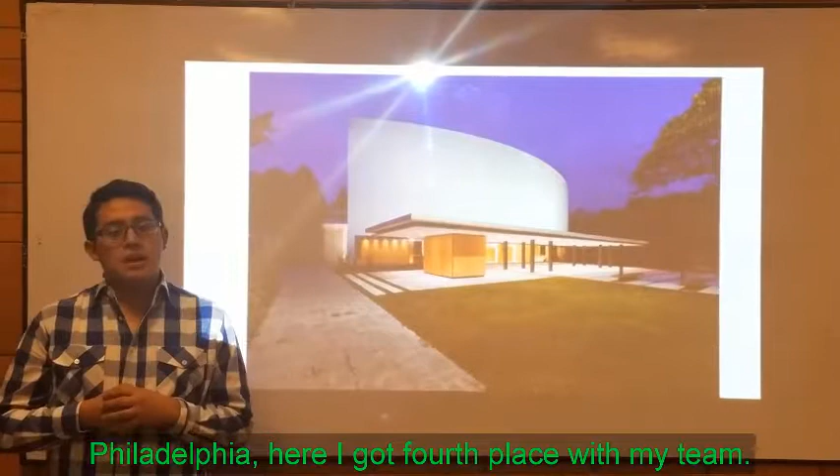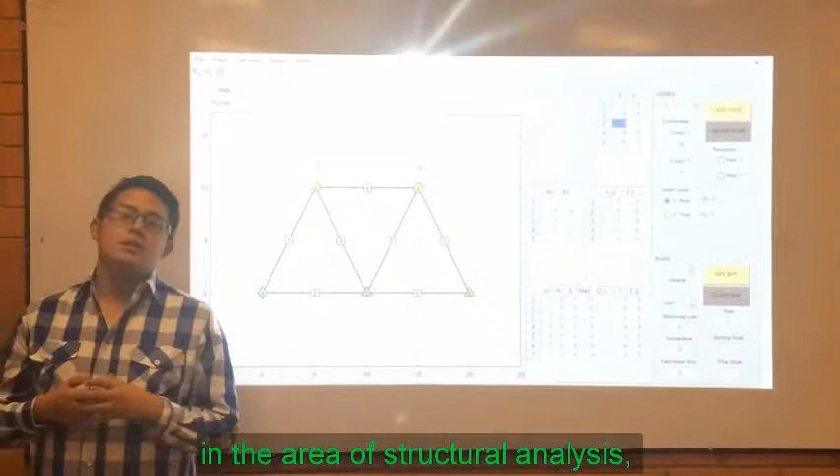I'm 22 years old. I was a professor assistant at my university in the field of advanced geomatics. I also participated in the fourth national competition of highly workable mortars, and in the international ACI Mortar Workability competition in Philadelphia, where I got fourth place with my team. I'm currently the president of the ACI student chapter at my university. One of my greatest aspirations is to be a high-level professional in structural analysis, with the objective of developing tools that allow the adaptation and application of new technologies in structural calculation.

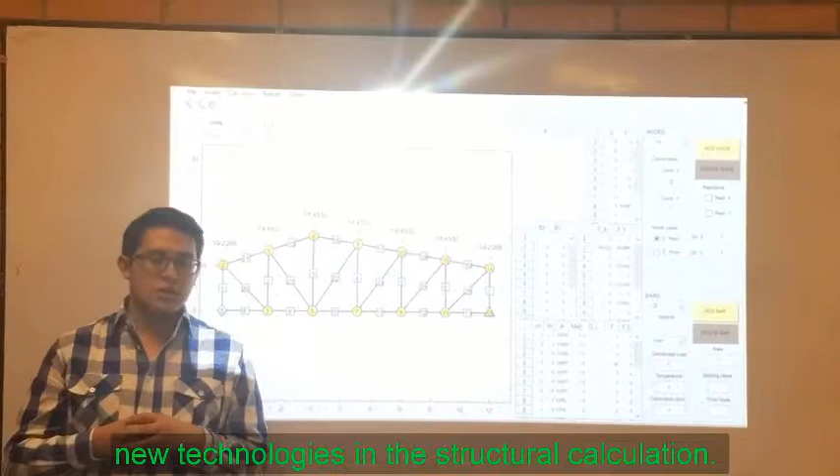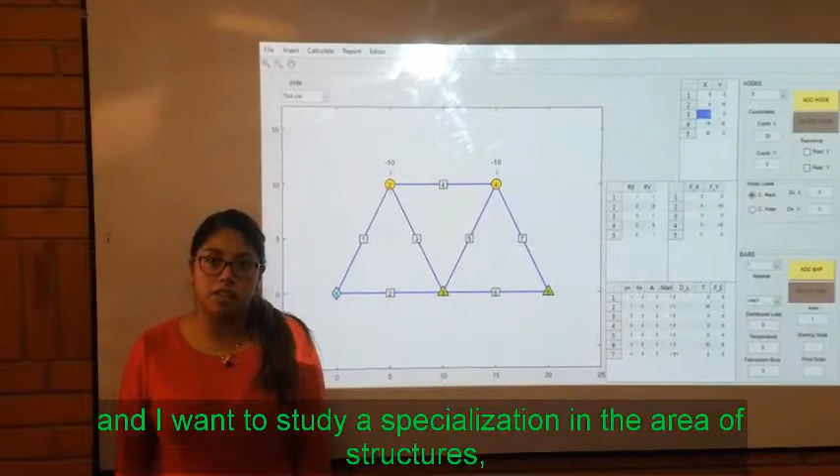Hello, my name is Diana Vasquez. I am 22 years old. Now I am a professor assistant. I am a member and co-founder of the ACI student chapter at my university. I am also the author of several articles published in my faculty's journal. Now I am in the 8th cycle of my major, and I want to study a specialization in structures. So from now we have been developing and strengthening our skills to achieve it, with the creation of this program.

My name is Martin Isaac. I'm 20 years old and I am in the 8th cycle of civil engineering. I am interested in structural engineering because it's difficult, and that challenges me to improve. Designing this analysis program was rewarding because it involved our imagination and developed some of our skills. I want to finish university and study a specialization in structural engineering.

Hello, my name is Cristian Picao. I'm 22 years old and I am in the 8th cycle of civil engineering. I study civil engineering because it's what passionates me, and I would like to be a great professional. With this project, I could see the potential of a technical career like engineering to resolve problems in an easier way.

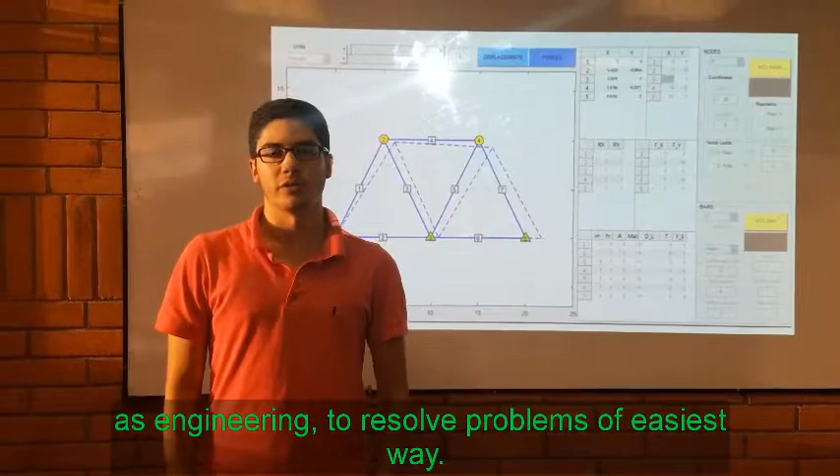The program consists of a main window, where you have the option to choose the units at any time during execution. The materials to be used can be modified from the Editor tab in the Edit Materials option, where you can create or delete different materials used in the structure.

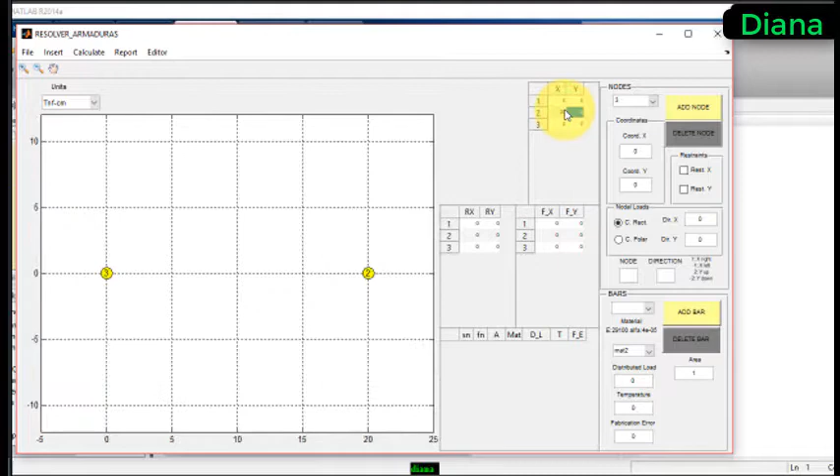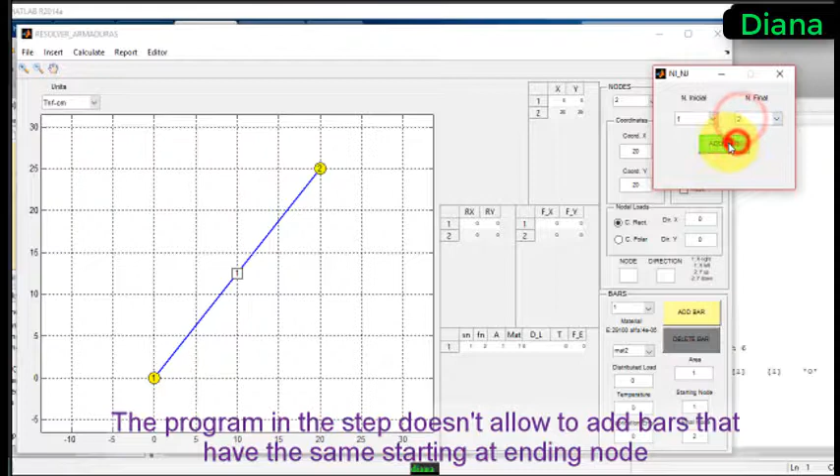There is also the option to perform linear and nonlinear analysis of the structure. If you choose linear analysis, you must add nodes and bars manually. If you make a mistake when placing them, they can be removed at any time. At this step, the program doesn't allow you to add bars that have the same starting and ending nodes. All properties of each bar and node can be modified from the tables or from the respective tabs.

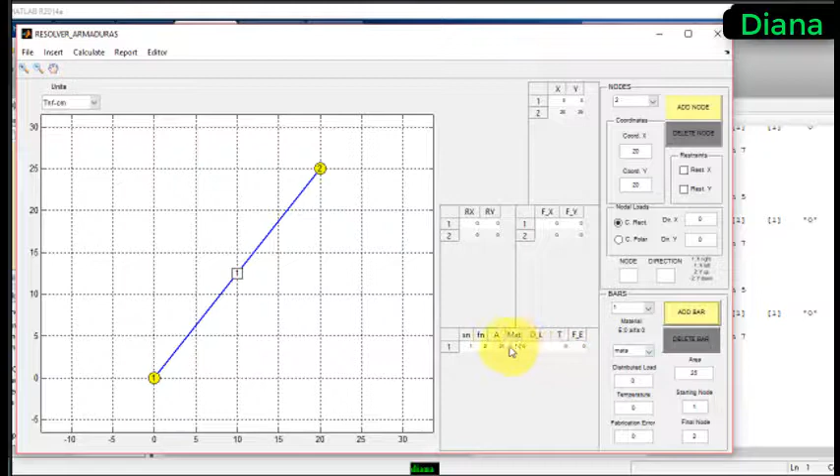When we choose the nonlinear option, we choose the node and the direction of the analysis to perform the calculations. In the program, you can also load previously created files.

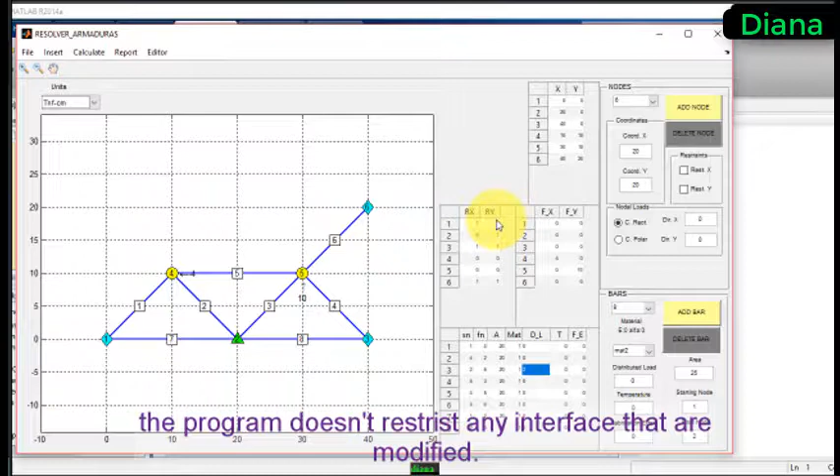The program does not restrict you from modifying any part of the interface. For example, you can assign a load to node 5, a vertical load of 5 tons, and then delete the distributed load first from bar 3.

To perform the analysis, select the Calculate tab and the respective analysis, for which the data must be recorded.

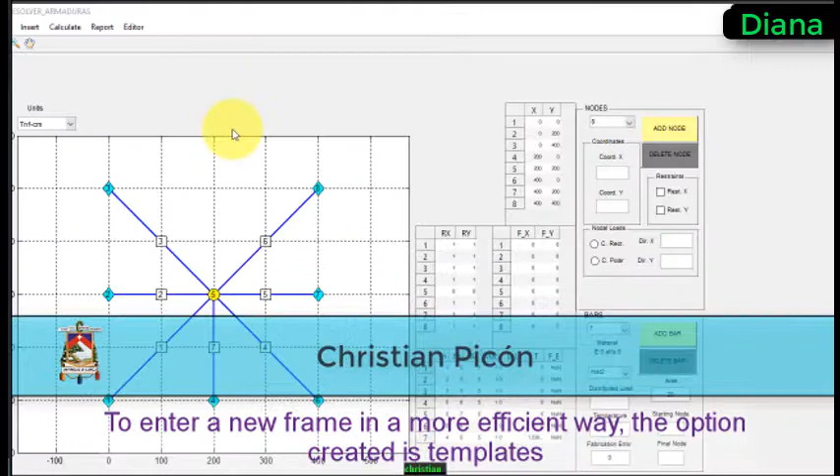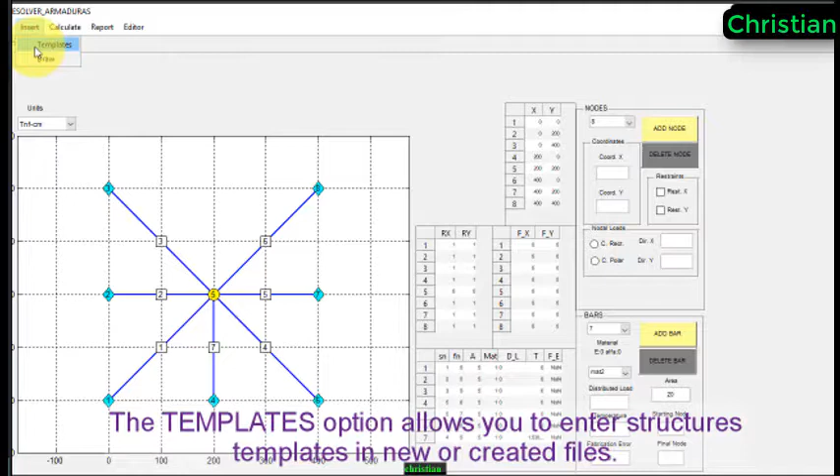To enter a new frame more efficiently, use the option Create Templates. Here, in the Insert option, you find Templates and Draw. The Templates option allows you to enter structure templates into new or existing files.

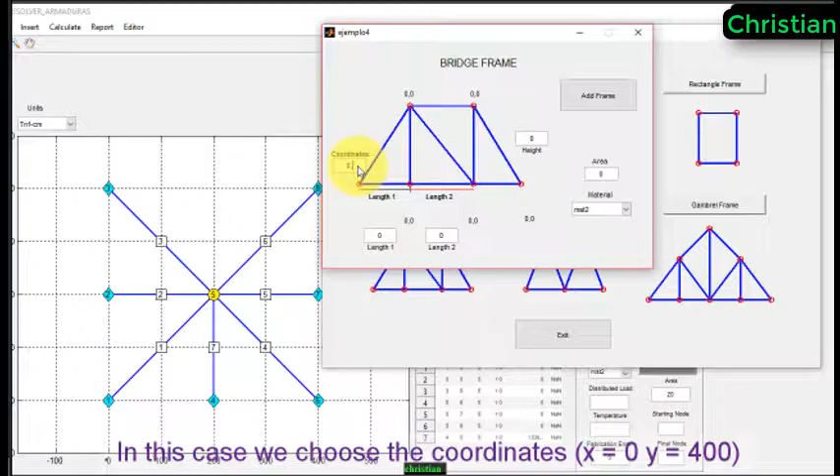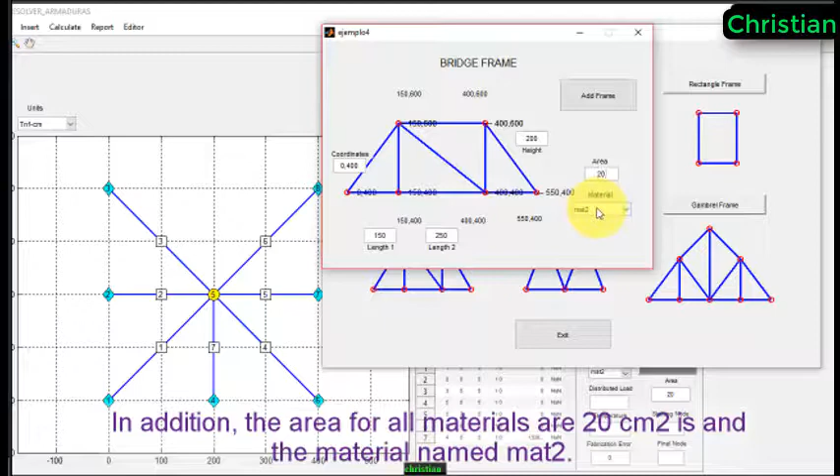For example, if we choose Bridge Frame, it's necessary to enter 4 parameters: the coordinates of the starting point, which can be located at any point on the plane, including existing nodes. In this case, we choose the coordinates x equals 0 and y equals 400, and the lengths 1 and 2, such as 150 and 250 respectively. The height of the frame will be 200. In addition, the area for all materials is 20 square centimeters, with the material named Mat2.

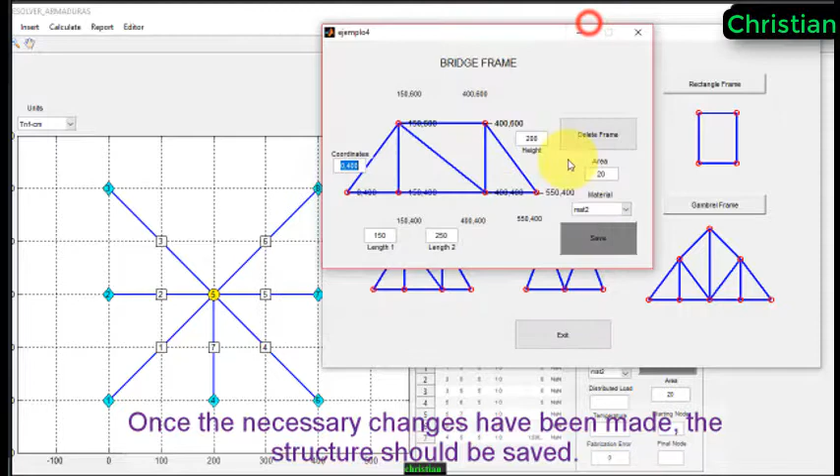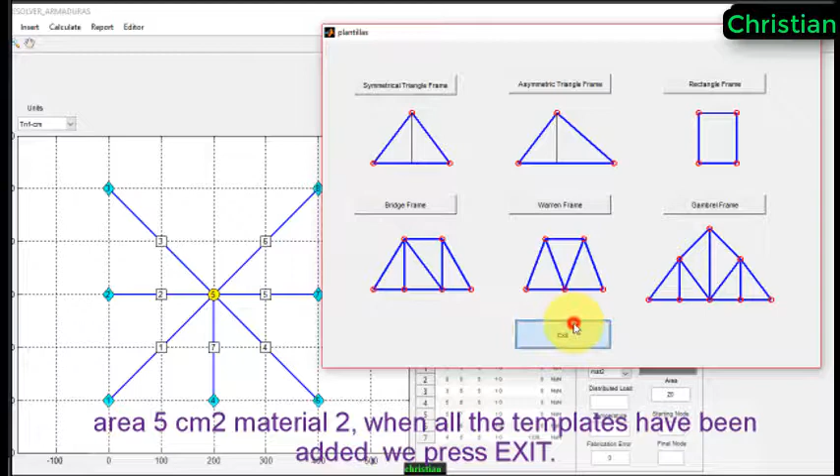You can choose various frames, like a Warren frame, where coordinate is 500, the length of 200 centimeters, and the height equal to 200 centimeters. Area of 5 square centimeters and the material 2. When all the templates have been added, we press exit. As you can see, the arrays are created and the structure is ready to be analyzed.

Another form to insert drawings into our program is with the menu draw. In this option, we can add nodes with double click, and we can add bars with clicks.

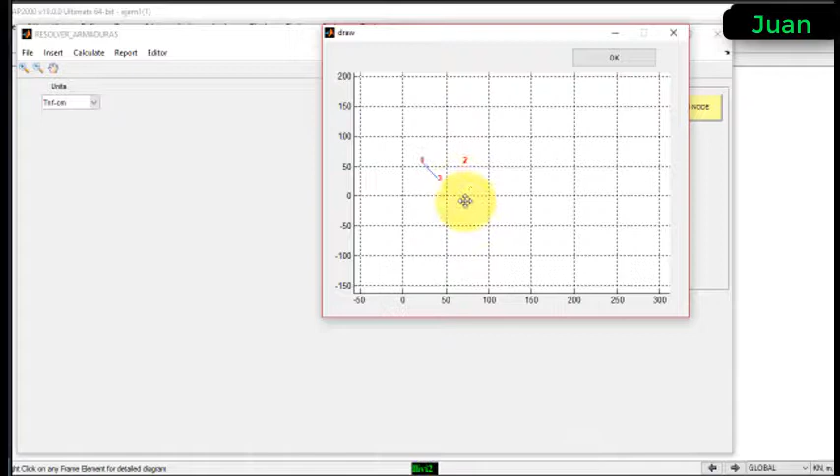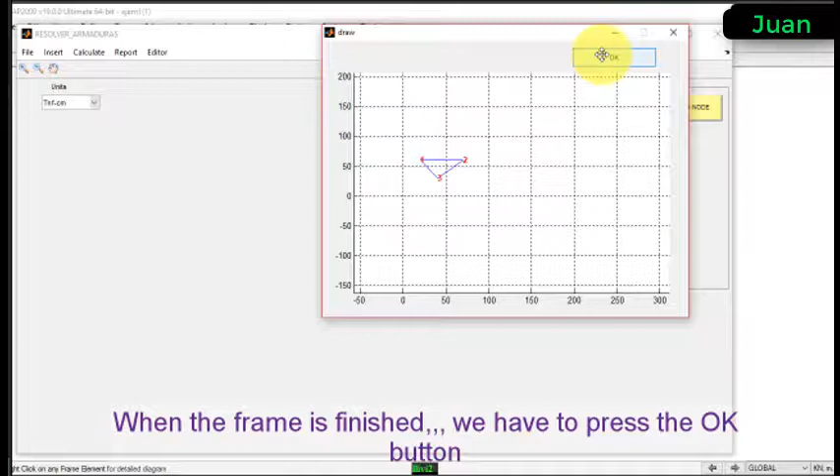The program can make zoom to set the points that agree. We can delete nodes or bars. When the frame is finished, we have to press the OK button and the data is added at our main window.

When we choose the linear analysis option using any method of data entry, we can run the linear analysis. For example, the network structure where only node 5 has movement freedom. The applied loads are 45 tons in the x direction and exist loads on the elements 1 and 7.

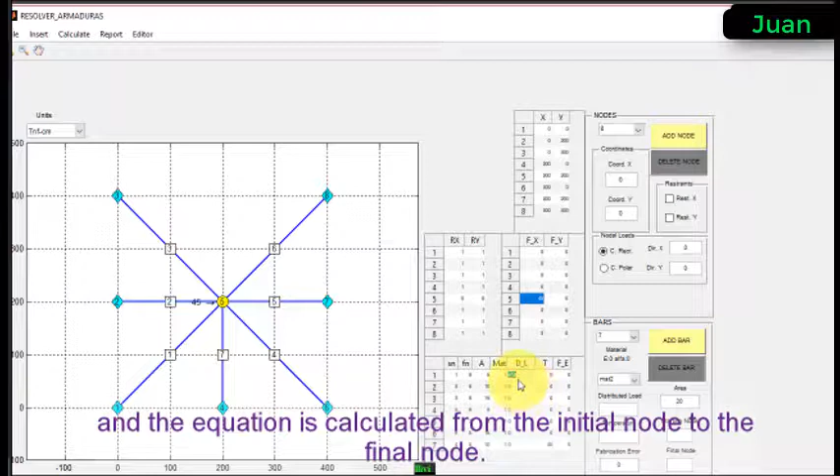The distributed forces can be placed as a function of the length of the element, and the equation is calculated from the initial node to the final node. When the structure is ready to be analyzed, the Calculate tab is chosen and the respective option is selected. In this case, the Linear Analysis option.

So I have to choose the folder to save the files. Within the analysis, all editing options are disabled, so you can see the movements of each node or force in each element.

An increase of the graphical scale of the force or displacements can be made if necessary. For example, for the displacement, we choose the next factor, or we can change the value. We can use the slider.

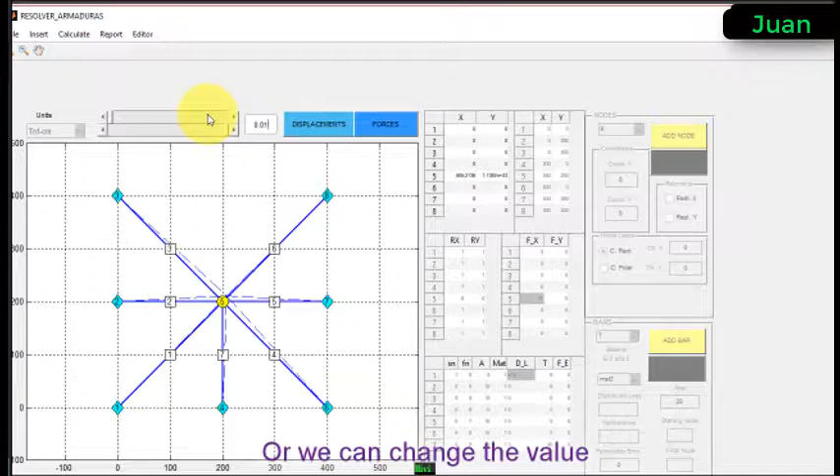Once finished, the calculations can be made into a report on a Word file with the report name. The file is saved in the folder where the corresponding scan files were saved.

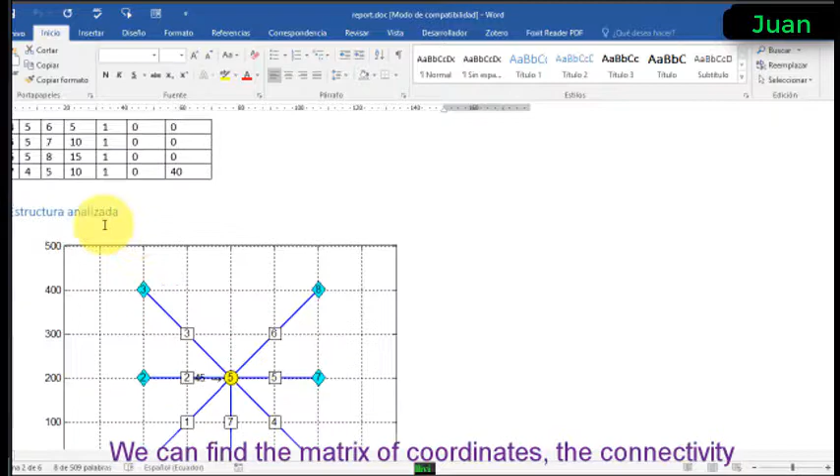In the report, we can see the data entry and the summary of the results of the linear analysis. We can find the matrix of coordinates and the connectivity, the graphical representation of the structure analyzed, the processing, and the results.

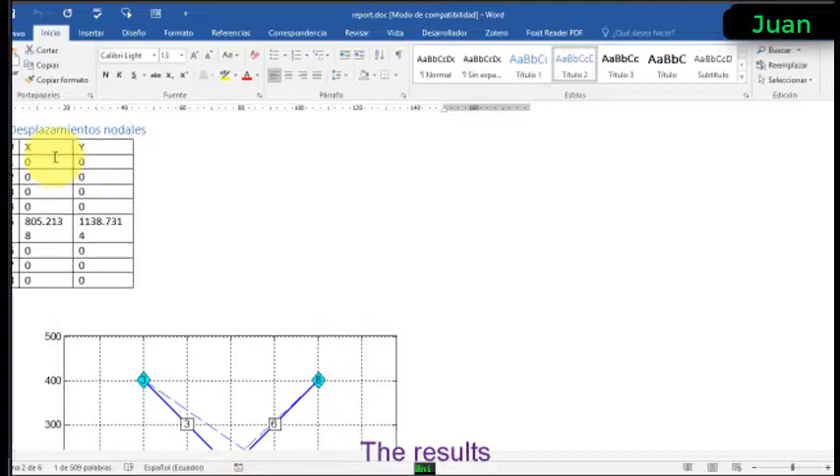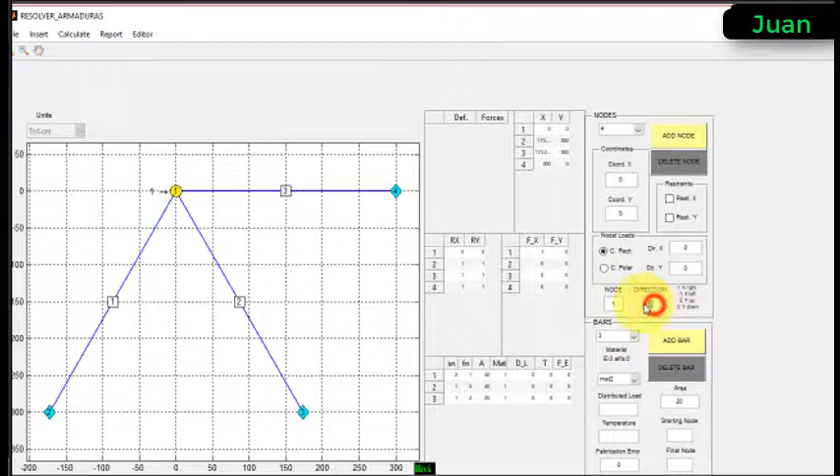If we choose the nonlinear analysis option, we can load existing files. In this option, we must choose the node and the direction in which you want to perform the analysis.

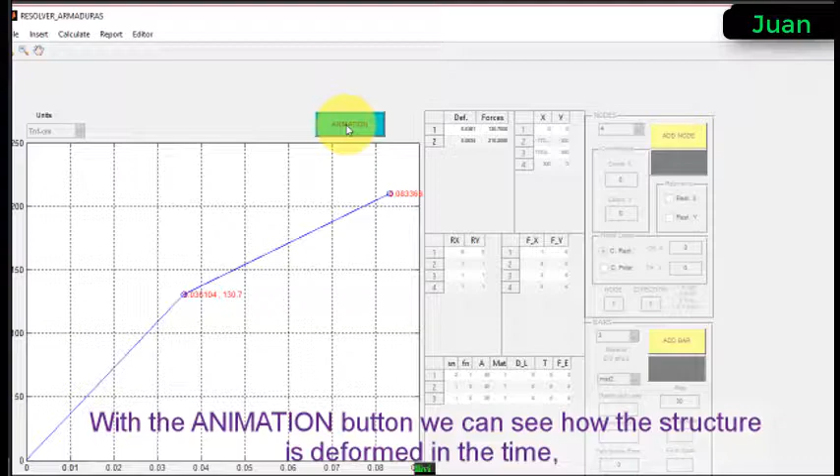Then we must select the tab Calculate and the option Nonlinear Analysis. We must save the files. With the animation button, we can see how the structure is deformed over time. In addition, the color change indicates the fluency of the bars as well as the change of the slope in the graphs.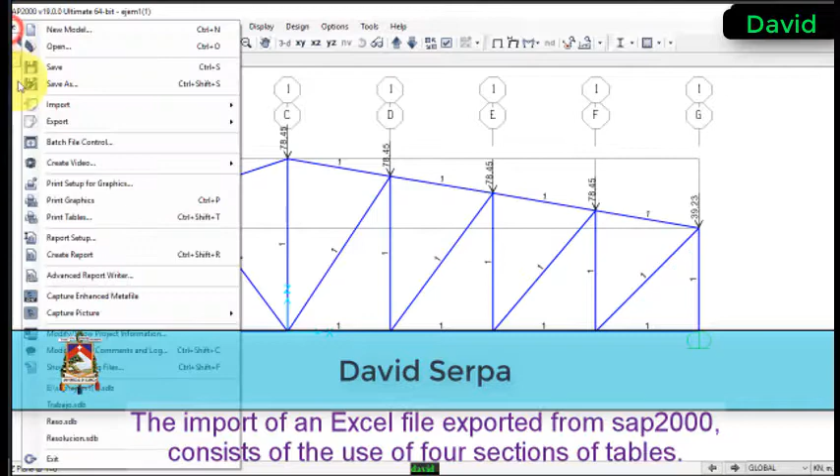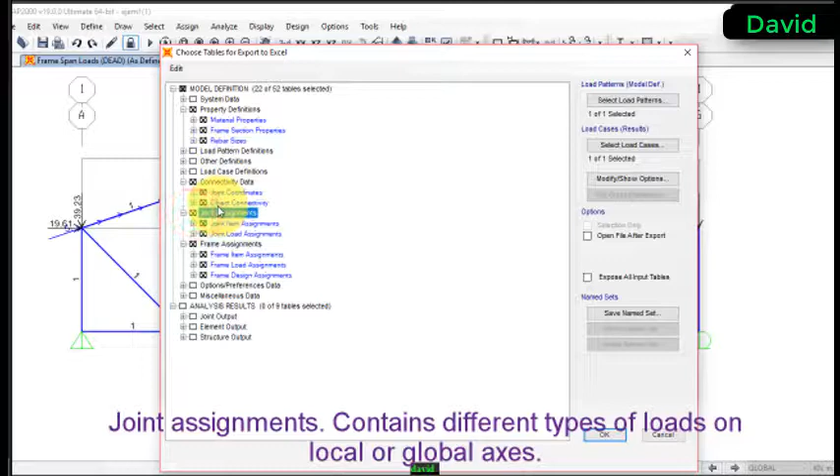The import of an Excel file exported from SAP 2000 consists of the use of 4 sections of tables. Connectivity data contains the connectivity matrices, coordinates, and nodal constraints of the structure. Joint assignments contain different types of loads on local or global axes. Frame assignments have data about section templates. Material properties has the properties of the material assigned to each section's template of the different elements of the structure.

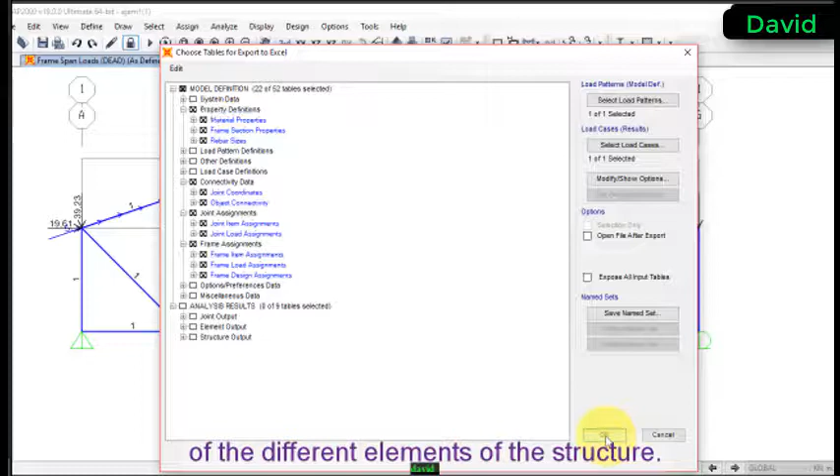Next, we save the file. In this case, the file name is example1.

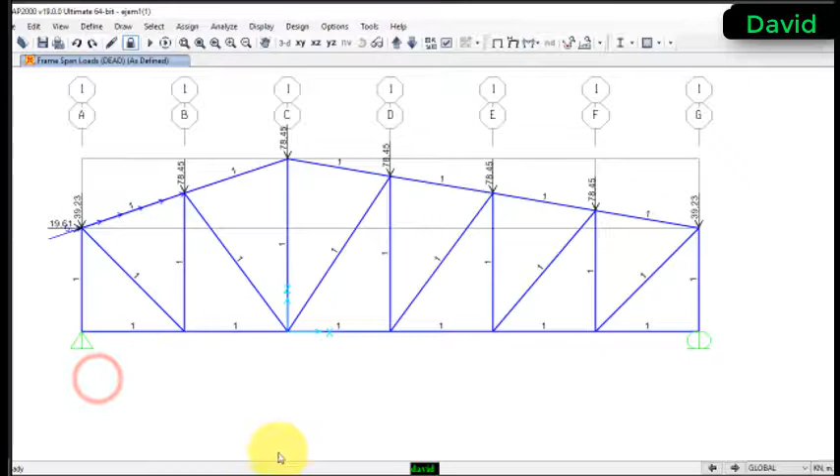The Excel file includes different sheets in which the structure information is stored in a special format and depends on the conditions in which the structure is located. Our program analyzes the SAP file and compiles the values to perform the analysis of the structure.

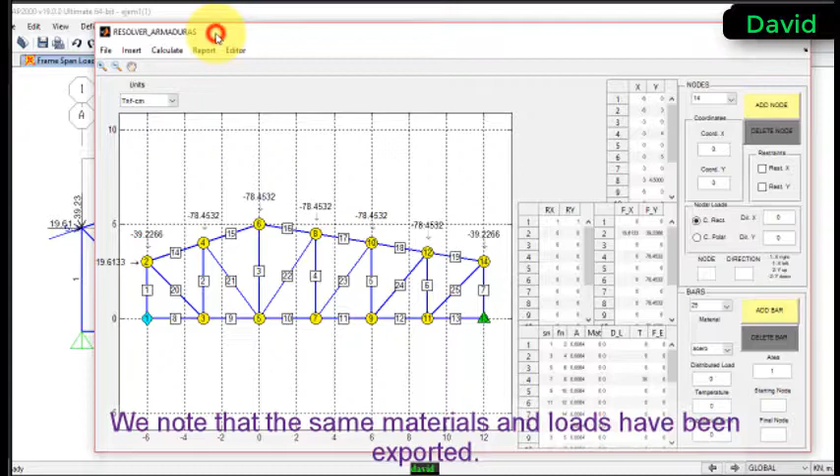Select the option File, press SAP 2000 Import, and choose the Excel SAP file. We note that the same materials and the same loads have been exported.

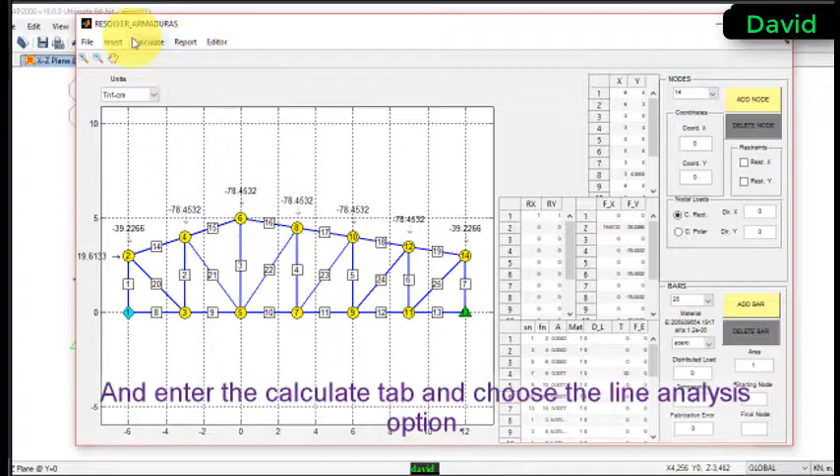Enter the Calculate tab and choose the Linear Analysis option. Save the file.

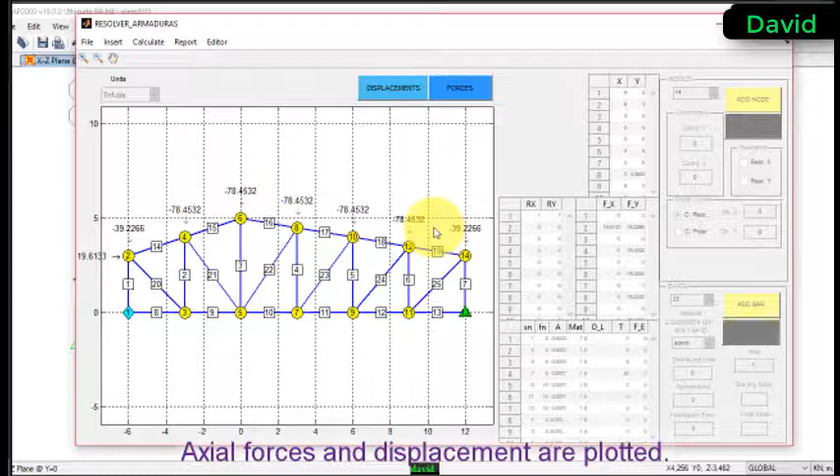The axial forces and displacements are plotted. We can see the same displacement and the same force values.

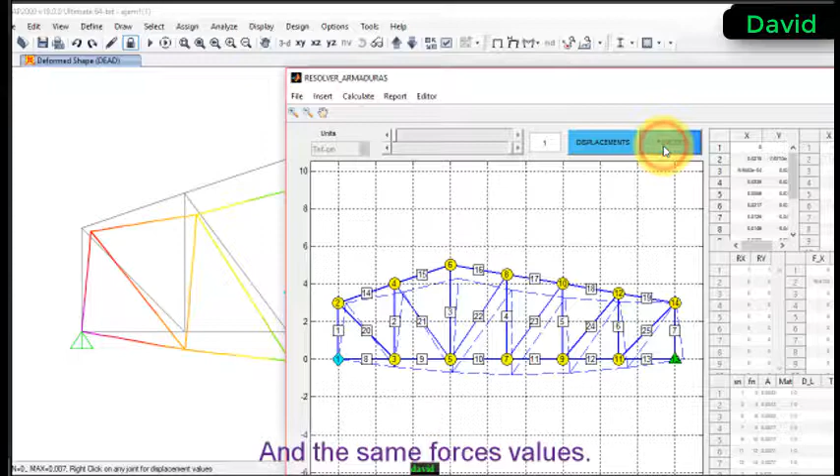The color convention is different, but the values of the forces are the same.